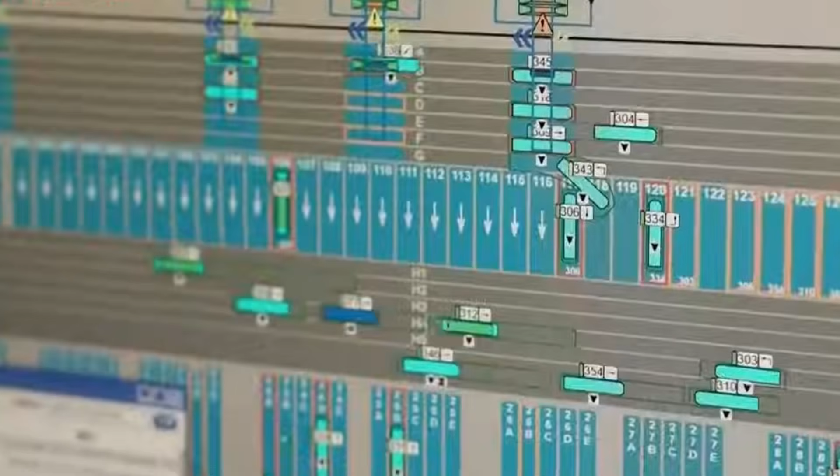It runs 24 hours a day, 365 days a year, and every single operation is performed by software, sensors, and a small group of remote operators sitting in a control tower kilometers away. Today, I'll show you the 8 things Chinese ports do that the rest of the world hasn't figured out yet. The ghost terminal in Qingdao, the container ship that docked itself last February, the hydrogen-powered cranes, the 5G control infrastructure.

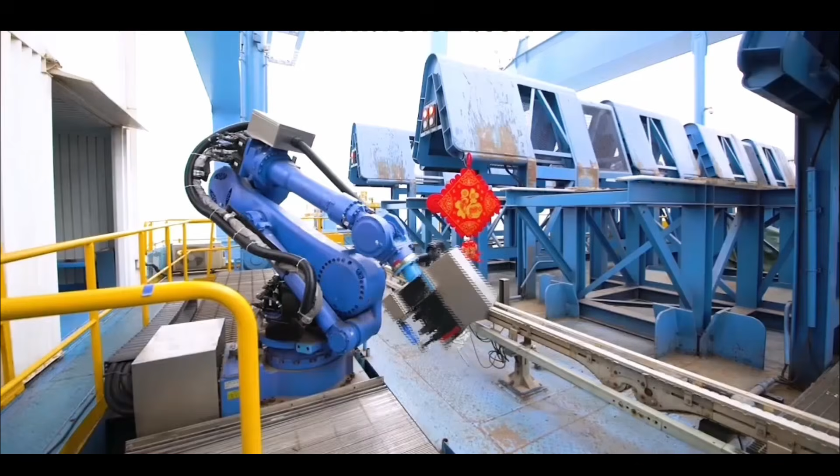Stay until the end, because the #1 entry on this list isn't a single port. It's the fact that this isn't happening in one place. It's happening everywhere. Number 8. The Qingdao Qianwan New Container Terminal, known internally as QQCTN, located in Qingdao in Shandong Province. According to Global Transport News Network and Equal Ocean, it became Asia's first fully automated container terminal in May 2017.

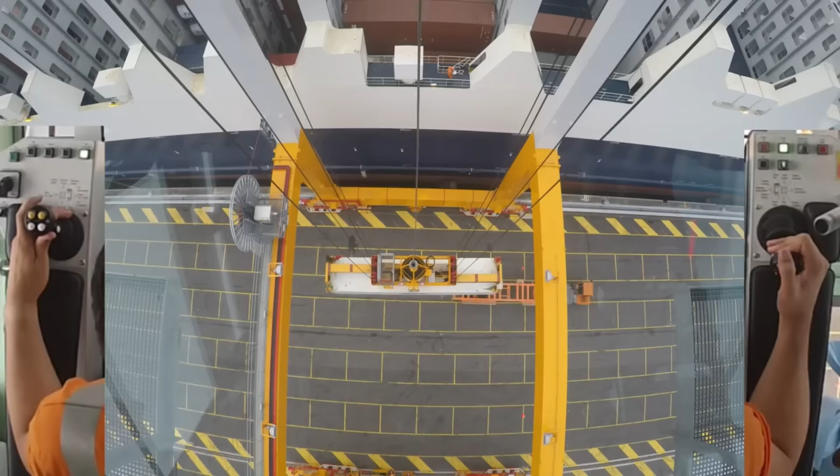The Western Maritime Press calls it the Ghost Port. Where most container terminals run on shifts of dock workers, crane operators, lashing crews, and stevedores, QQCTN runs on machines. According to industry coverage, the cranes are unmanned. The container trucks are unmanned. Even the lashing of the containers, the tying down operation that secures cargo against ocean weather, has been mechanized.

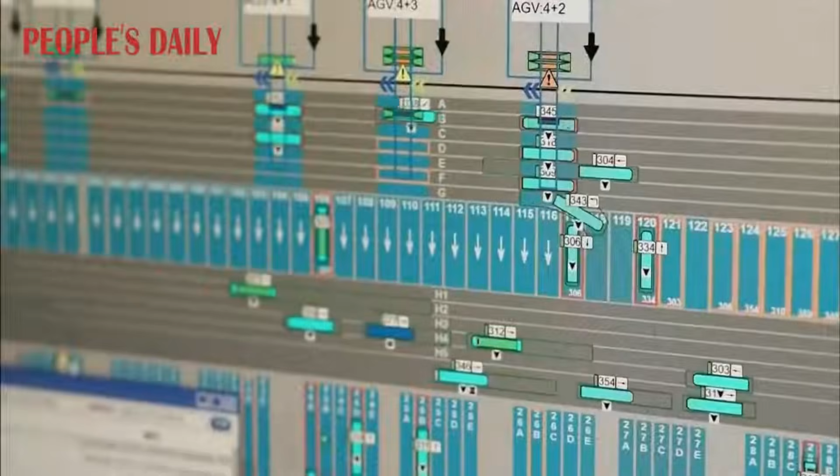The port is staffed by software, sensors, fiber optic cables, and a small group of remote operators sitting in a control tower kilometers away. What's most extraordinary is the productivity. According to Global Transport News Network, QQCTN holds the world record for crane operations productivity. The terminal moves containers faster, with fewer breakdowns, and at lower cost than any other automated facility on Earth.

According to People's Daily, the operation runs on a combination of artificial intelligence, robotics, 5G connectivity, and hydrogen-powered cranes. It is one of the cleanest container terminals ever built. And here's the loop opener. QQCTN was Asia's first. According to industry data, China today has 18 fully automated container terminals operating. 27 more are under construction. The story doesn't end at Qingdao. We come back to that.

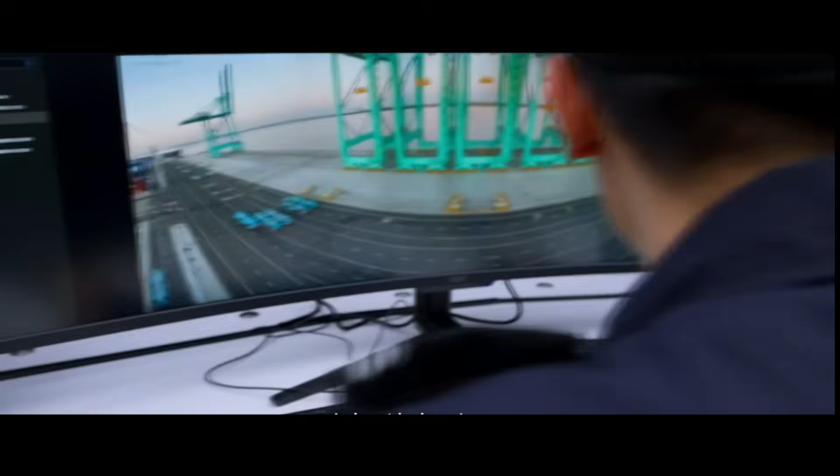Number 7. Yangshan Phase 4, the largest automated container terminal in the world. According to Xinhua, the Maritime Executive, and Hapag-Lloyd, Phase 4 of Shanghai's Yangshan Deepwater Port began trial operations on the 10th of December 2017. Built at a cost of approximately $1.8 billion on 550 acres of reclaimed island, the terminal opened with 7 berths, 10 ship-to-shore bridge cranes, 40 rail-mounted gantry cranes, and 50 automated guided vehicles. By 2024, it had been expanded to 26 bridge cranes, 120 gantry cranes, and 130 self-driving vehicles.

Its productivity is staggering. According to the Shanghai International Port Group, Yangshan Phase 4 handled over 8 million TEUs in 2024, single-handedly more cargo than most national port systems handle worldwide. According to Hapag-Lloyd reporting, 60,000 transmitters are embedded in the ground beneath the terminal to guide the AGV fleet. Most surprising of all, it's not a one-off.

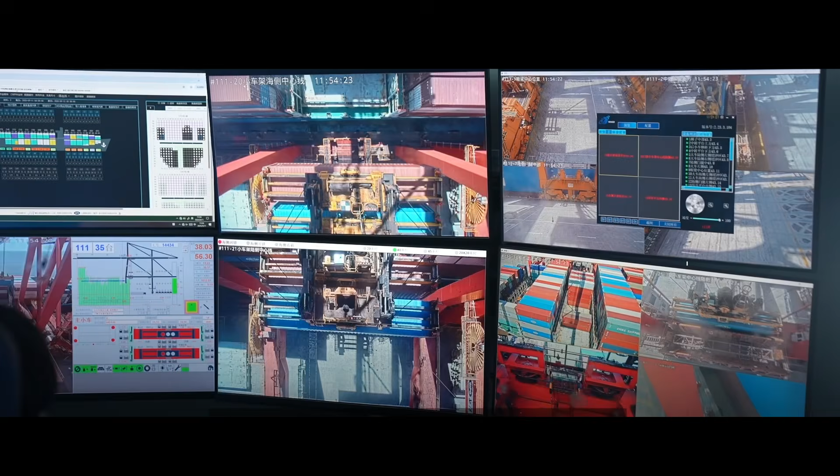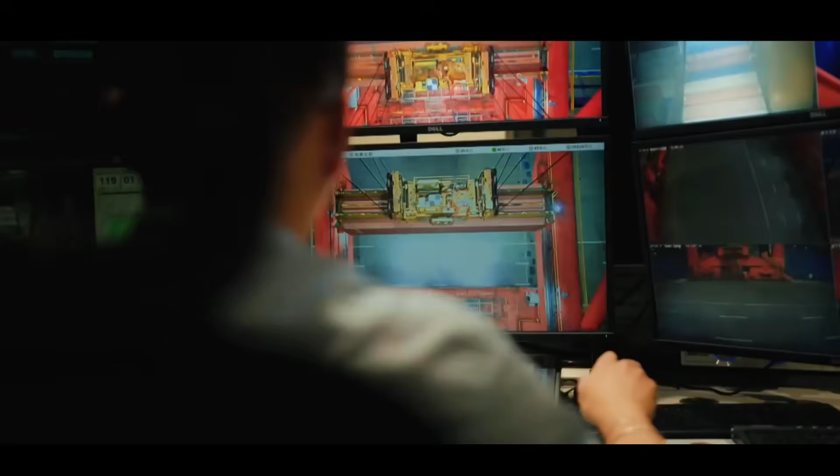According to coverage in the China Daily, Shanghai Port has a second automated terminal at Luojing, also operated by a different fully autonomous system called Neotos. The same city, 2 automated terminals. And the new ones aren't just automated, they're intelligent. And while Yangshan Phase 4 is the biggest, the next entry on this list is what happened when the cargo ship learned to dock without help.

Number 6. The Zhifei, the container ship that drove itself into Qingdao. Wait, listen to this. According to Prototyping China, in February 2026, a container ship called the Zhifei, China's first commercially deployed intelligent container vessel, approached the fully automated terminal at Qingdao Port and did something quietly radical. It sailed itself in, it docked itself, it completed loading operations without human hands guiding the process.

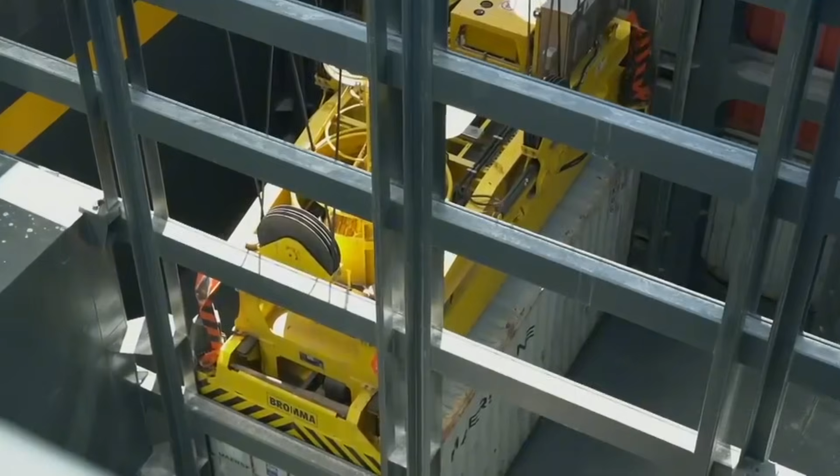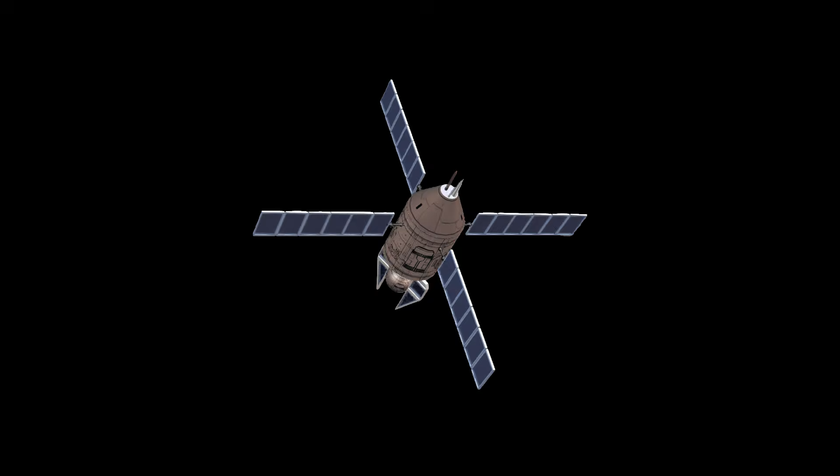There was no pilot leaning over a railing reading water currents, no tugboat captain on the radio, no deck crew working with hand signals. The Zhifei used its own onboard systems, radar, cameras, satellite positioning, and onboard navigation algorithms to map its path in real time.

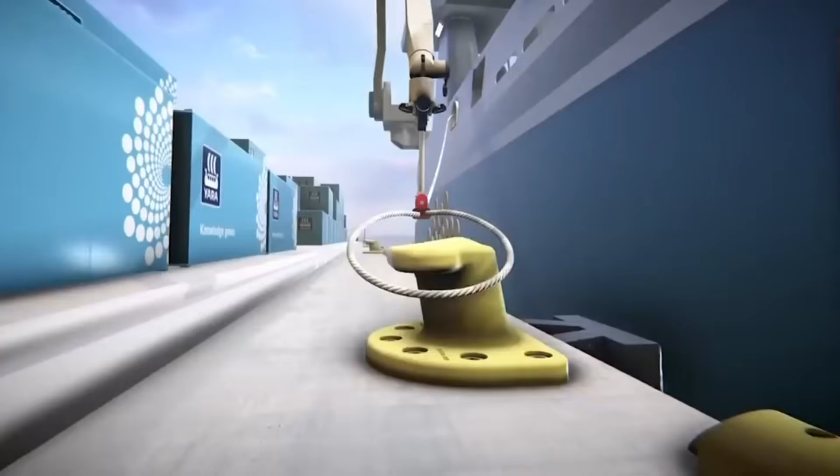It adjusted its speed and alignment without human input. And when it reached the dock, the automated control systems at Qingdao recognized the ship's digital handshake. The terminal began unloading itself. This is what happens when an automated terminal meets an autonomous ship. Software talks to software. The container handling sequence runs end-to-end without a single human in the chain.

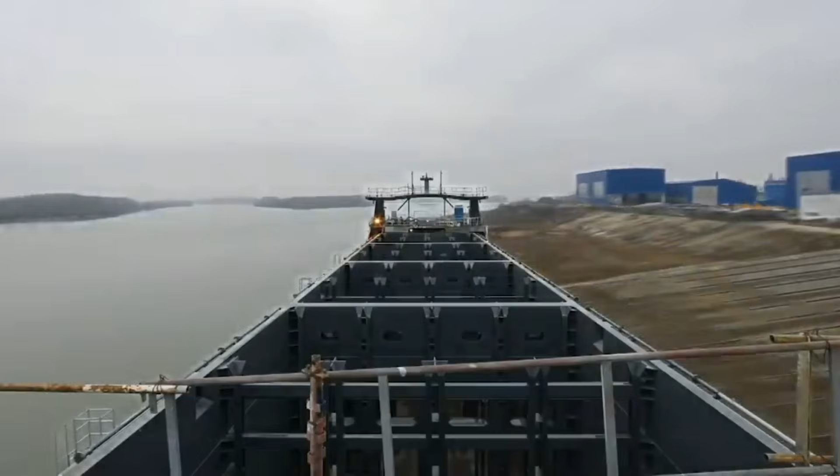According to industry coverage, the vessel can also be operated manually or by remote control. On that day, it chose autonomy. A ship docked itself, a port unloaded itself, the cargo arrived, and then the next entry on this list shows what happens when the unmanned vehicles inside a port start outnumbering the humans by 10 to 1.

Number 5. The Tianjin Port Section C Smart Terminal. Built by Tianjin Port Group together with Huawei and other partners as part of China's push to build smart and green ports. According to GovInsider Asia and Huawei's public reporting, the terminal of Section C in the Beijiang port area of Tianjin Port operates a fleet of 76 unmanned intelligent guided vehicles.

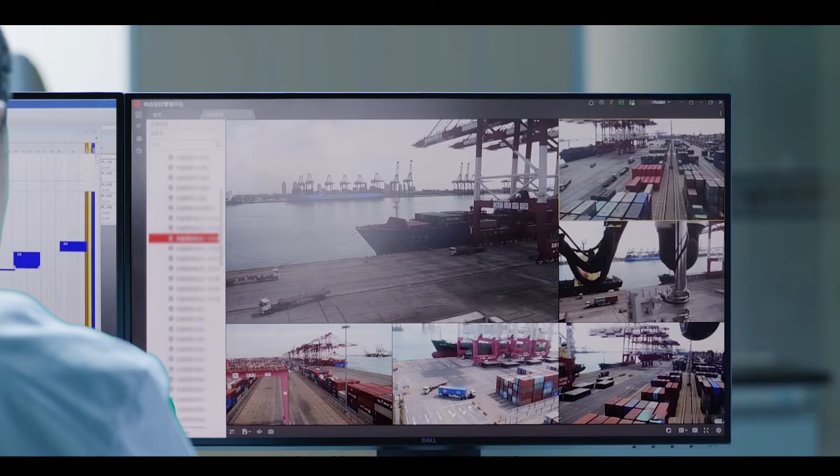Each vehicle drives itself across the terminal, picking up containers from the cranes, transporting them to the holding yard or rail loading area, and returning for the next assignment. The fleet is centrally dispatched through cloud-based scheduling. There are no driver cabs. There is no human steering. The vehicles charge themselves at scheduled intervals using Huawei's intelligent charging dispatch algorithm.

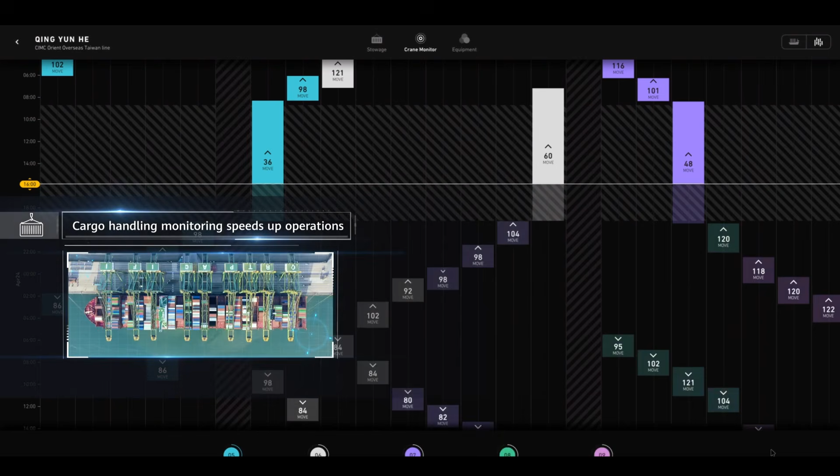Most striking is the level of integration. According to Huawei, an intelligent intersection dispatching algorithm allows the port to preset traffic policies that mix manual tractor trailers with autonomous trucks. Where mixed traffic is required, the system handles right-of-way decisions automatically. The terminal demonstrated large-scale commercial use of L4 driverless capability, a level of autonomy that, in the automotive context, hasn't reached commercial deployment in any country.

Tianjin Section C is also the first port in the world to combine that level of autonomy with full self-sufficiency in green electricity. The port generates its own power. The vehicles drive themselves. The cranes are remote controlled. The terminal is an industrial closed loop.

We're halfway through. The next 4 entries include a fleet of port cranes powered by hydrogen instead of diesel, a 5G control system that handles a port's entire operations from a few computers, and at number 1, the single fact that turns this from a story about one port into the largest single-decade transformation in global shipping infrastructure ever attempted.

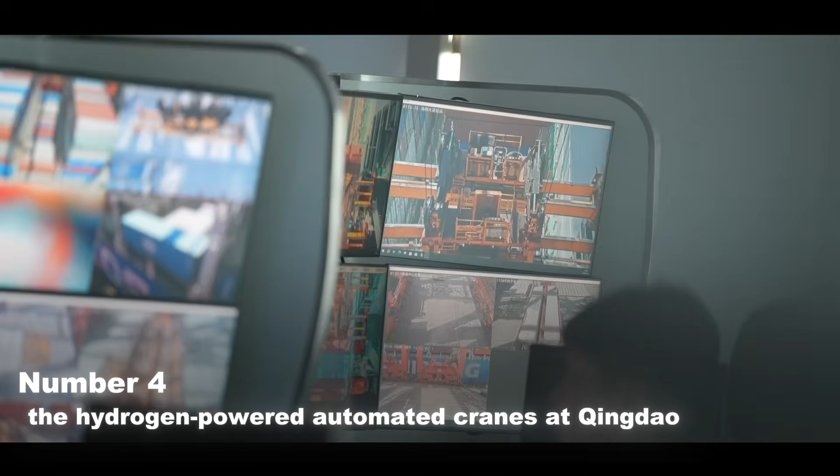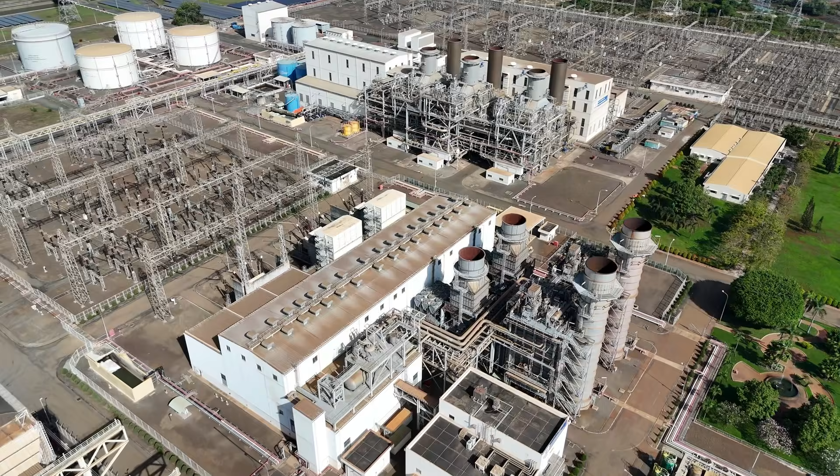Number 4. The hydrogen-powered automated cranes at Qingdao. According to Global Transport News Network, the Qianwan terminal pioneered the world's first hydrogen and 5G integrated automated container terminal model. Container terminal cranes have traditionally been powered by diesel generators, or more recently, by grid electricity. Both come with environmental costs. Diesel produces nitrogen oxide and particulates. Grid electricity in coastal China often originates from coal-fired power stations.

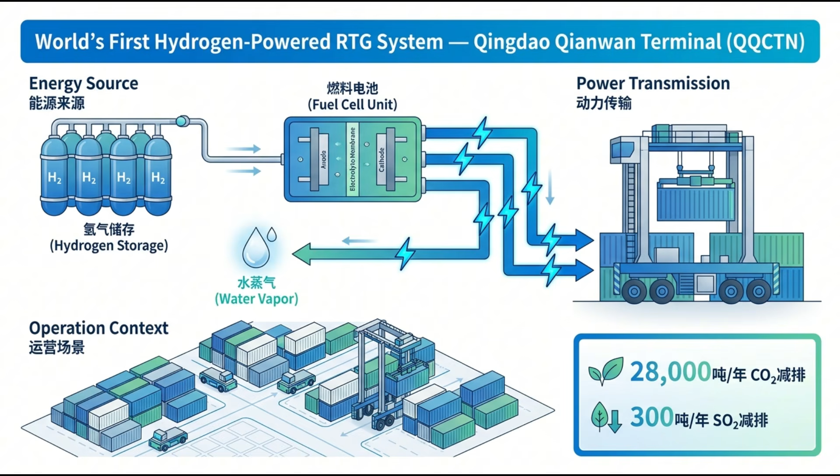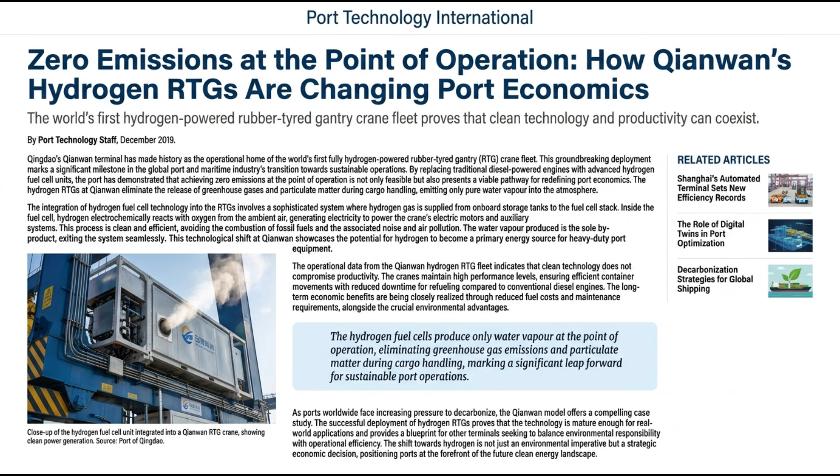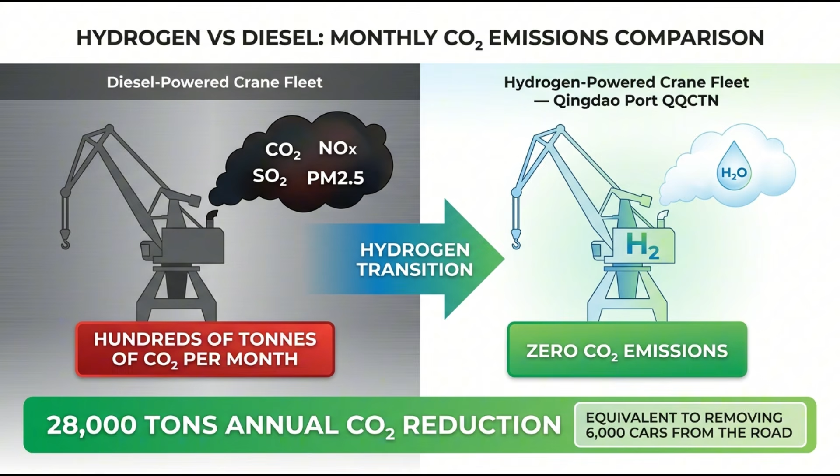The Qianwan team chose a third path: hydrogen fuel cells, stationary units providing power for the rubber-tired gantry cranes that move containers around the storage yards. According to industry coverage, the hydrogen-powered cranes operate at 0 emissions at the point of operation. The fuel cells produce only water vapor as a byproduct, where a comparable diesel-powered crane fleet emits hundreds of tons of carbon dioxide per month. The Qianwan hydrogen units emit nothing.

According to the People's Daily, this fits inside a broader Chinese port strategy: smart, automated, and green. Most other major ports in the world are still in pilot studies for hydrogen. Qingdao is past the pilot. The cranes have been running for years.

Number 3. The AGV, the Automated Guided Vehicle. This is the pattern interrupt. Across every Chinese automated port on this list, the same machine appears. A flat, low-profile vehicle on wheels that drives itself, carries 1 or 2 containers, navigates by transponder grid embedded in the road surface, and returns to position at a charging station when its batteries get low. According to industry documentation, the AGV is the workhorse of modern Chinese port automation.

Here's what catches you. The vehicles have no cabs, no steering wheels, no windshields, no mirrors, no seats. According to Hapag-Lloyd's description of Yangshan Phase 4, where you might expect to see a fleet of trucks driving back and forth across a working port, you instead see a procession of low, flat platforms gliding silently between the cranes and the storage yards.

From a distance, it looks less like a port and more like an enormous warehouse robot, and the scale is what makes it strange. According to Shanghai International Port Group, Yangshan Phase 4 alone operates over 130 AGVs simultaneously. Tianjin Section C operates 76. Qingdao Qianwan operates dozens more. Across China's 18 automated terminals, the active AGV fleet runs into the thousands. According to industry coverage, this is by far the largest commercial deployment of self-driving freight vehicles anywhere in the world.

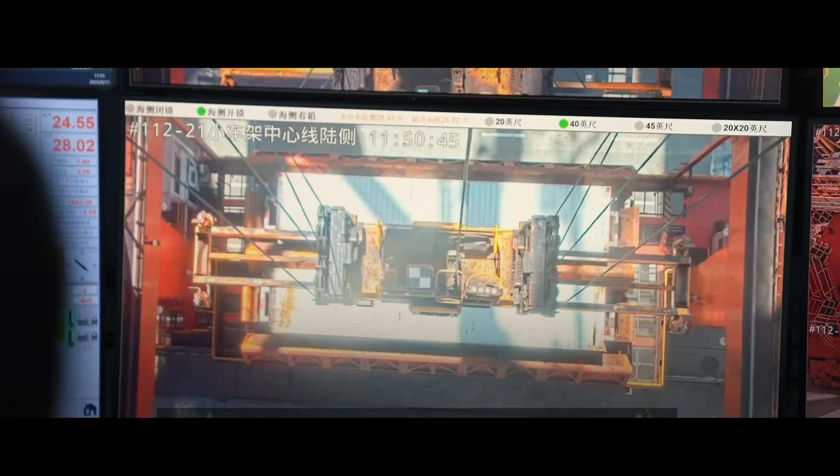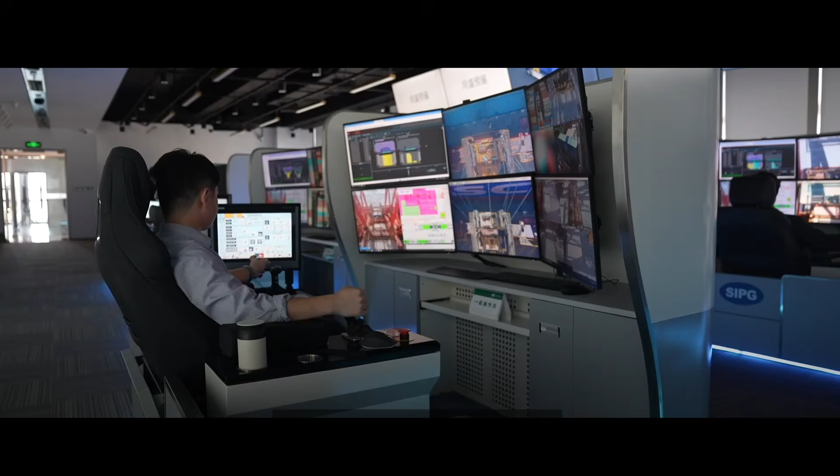Most striking is what 5G unlocked. According to coverage in the same UNESCAP study, Qingdao's 5G platform allowed crane operators sitting in the control tower to lift containers using over 30 high-definition cameras, low-latency joystick controls, and real-time data streams from programmable logic controllers across the entire terminal. Before 5G, this kind of remote operation was technically possible but economically impractical. The bandwidth wasn't reliable enough, the latency wasn't low enough. After 5G, it became standard. Tianjin built on the Qingdao model. Yangshan Phase 4 adopted similar wireless infrastructure. Today, every major automated terminal in China runs on 5G or faster wireless backbones.

Number 1, 45. The single number that explains everything you've just seen. According to Global Transport News Network, China currently operates 18 fully automated container terminals. Another 27 are under construction or undergoing automation upgrades. 45 terminals total. Here's what that means in scale. Each of those 45 terminals can handle multiple millions of containers per year. Each runs on the same combination of remote-controlled cranes, AGV fleets, 5G infrastructure, hydrogen power, and increasingly, autonomous vessel docking.

According to EqualOcean, autonomous container trucks are now operating across a north-central-south deployment pattern that includes Shanghai Yangshan, Tianjin, Ningbo Zhoushan, Qingdao, Xiamen, Guangzhou, and Shenzhen. The technology is no longer concentrated in one terminal. It is the standard. And here's the detail that closes the loop.

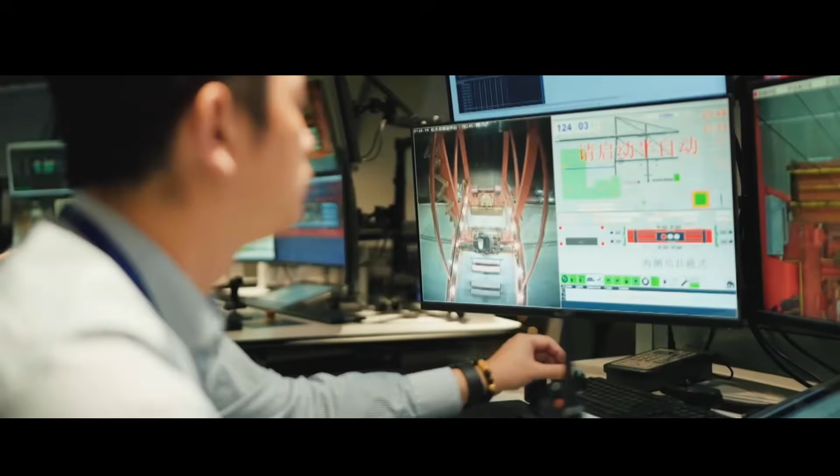According to Global Transport News Network, the rest of the world combined operates fewer than 10 fully automated container terminals. Rotterdam has automated berths. Hamburg has automated berths. Long Beach has limited automation. Los Angeles is upgrading. But the largest single concentration of fully automated terminals on Earth is on the Chinese coast. The Qingdao Ghost Port we covered at number 8 is the prototype. The 45 terminals, operational and under construction, are the production model. This is what happens when a country decides to remake an entire industry.

These are the 8 things Chinese ports do that the rest of the world hasn't figured out yet. The Qingdao Ghost Port that runs without dock workers. Yangshan Phase 4 with 60,000 transmitters embedded in the ground. The container ship that docked itself in February. The hydrogen-powered cranes. The 5G control infrastructure. And the 45 automated terminals reshaping the global shipping map. At this scale, ports stop being a logistical bottleneck. They become an industrial base.

These 8 ports show what Chinese engineering does when it removes the human from the dock. But what's being built in the labs and factories nearby is even more striking because it's removing the human from the body itself. China just built a humanoid robot that can run a half marathon, 13.1 miles, faster than most people can run it on 2 legs of their own. In April 2026, a Chinese-built humanoid named Lightning crossed a finish line in Beijing in 50 minutes and 26 seconds. According to NBC News, that time would have placed first against 12,000 human runners on the same course.